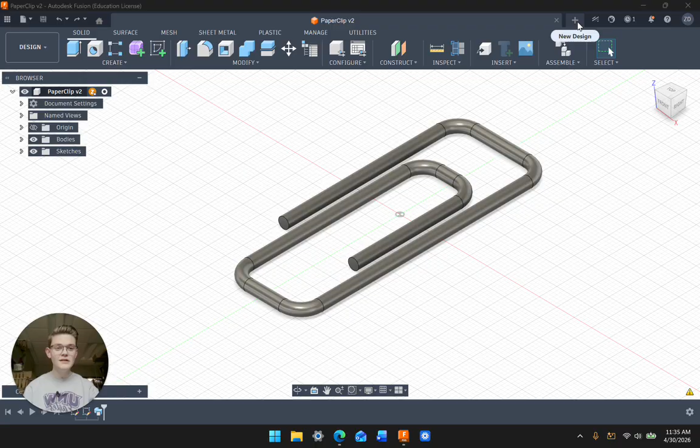The first thing, we're going to create a new design, and we are going to create a sketch on the base plane here on the bottom. Now we're going to make the overhead view of the paperclip, so we're going to create a line going 50 millimeters up.

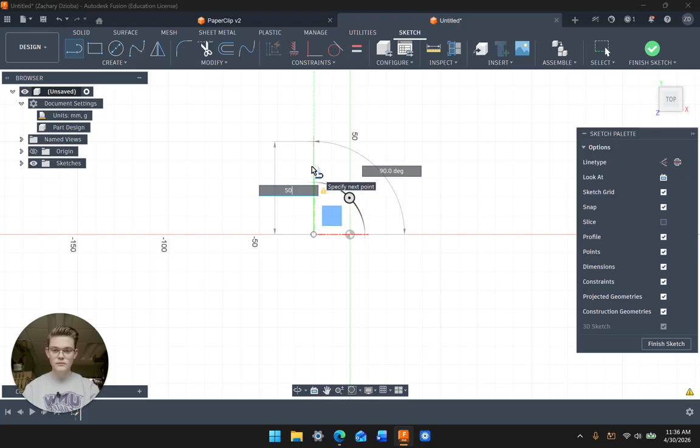Oh, my line just disappeared there. We'll try again. And then we're going to make a line going 25 millimeters over here.

Now we're going to go down 70 millimeters. We're going to go over 20 millimeters. We're going to go up 55 millimeters. We're going to go over 15 millimeters.

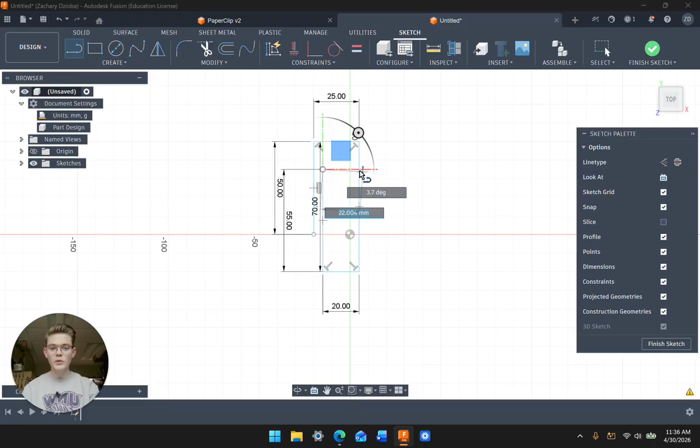Oh, my line deleted itself again. It's always when you have your mouse cursor on that. You can see there's this red line. If you have your mouse cursor on the red line, for whatever reason, it just doesn't like to work.

We can do 15 millimeters here, and then we're going to go down 35 millimeters. And now we have our general outline of our paperclip.

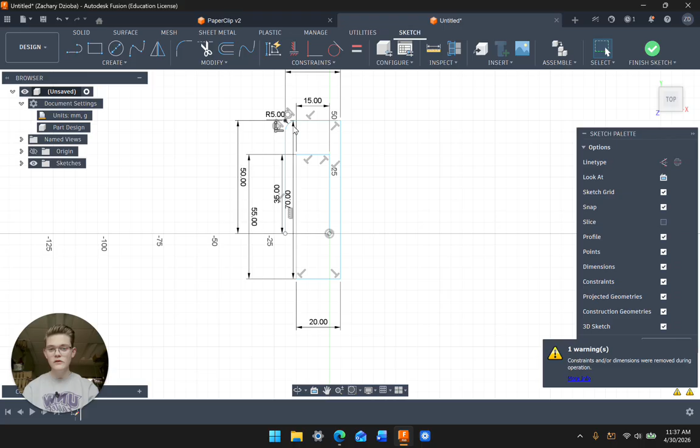It's kind of hard to see right now, but one last touch that I'm going to do is fillet some of these edges. I'm just going to use the standard fillet of 5 millimeters here. Then you can fillet all these edges, and then we can finish sketch, and we have this overhead top view of a paperclip.

Now we're going to create another sketch. Essentially what we're going to do is create a sketch and then sweep it on the profile that we just created, and that's what the sweep tool does.

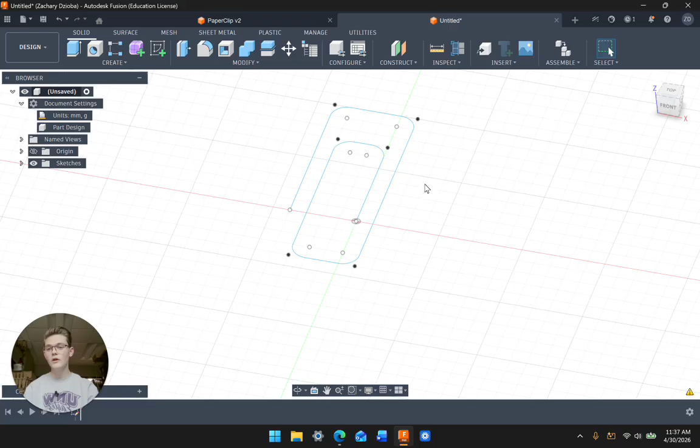So we can create a sketch, and we're going to create it on this plane because we want to create a circle that's contacting this point here on the paperclip. To do this, make sure over here you have 3D sketch turned on. It's usually turned off by default, but we're going to use it here so we can place our circle on this point right here.

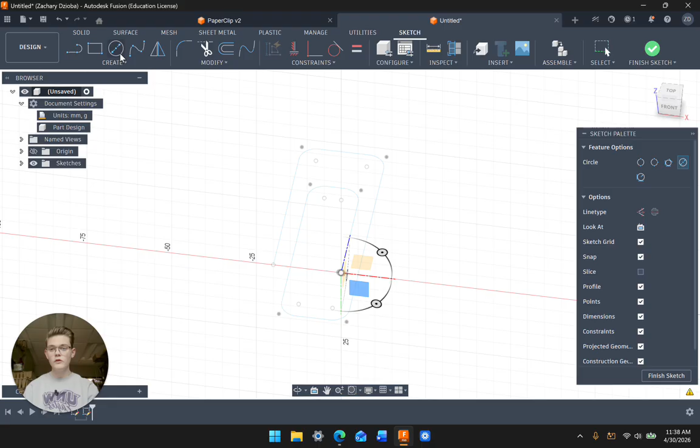With 3D sketch, you can actually, for example, if I create a circle on this point, it moves my plane to that point. So that's just really convenient and nice to use there.

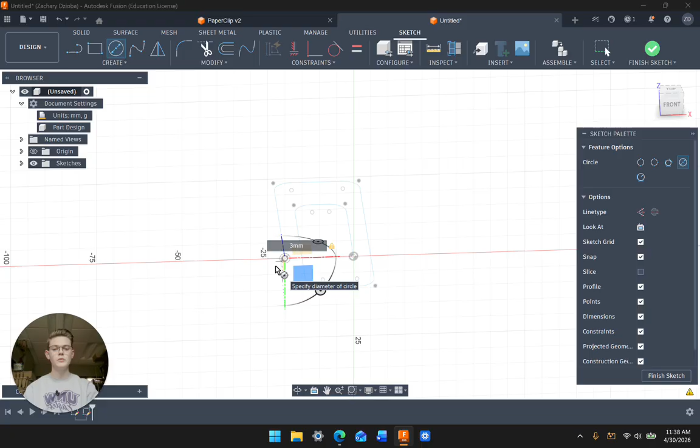So we're going to create our circle right here because this is our profile that we're going to put on our path. And then we're going to just make this 3 millimeters. Pretty tiny, but it'll look pretty good once we get it done. Then we can just click enter.

In future sketches, I would probably advise turning off 3D sketch unless you're actually using it, because sometimes it can screw with things if you aren't actually using it as a 3D sketch.

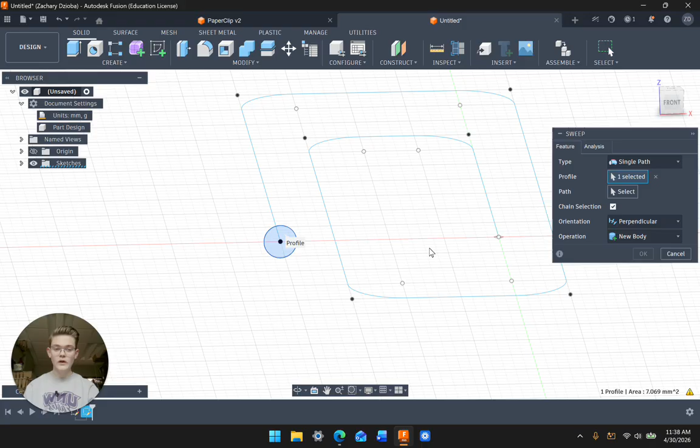So now what we can do is use the sweep tool. Right in here, the sweep tool, and for profile, we're going to select this profile. For path, we're going to select our sketch, and then you can see it makes it 3D, and it makes it into our paperclip.

And that's essentially just how to use the sweep tool. Don't forget to save your project afterwards. You can use it with different profiles, different bodies, and different paths. It makes it really nice to make sometimes more complicated models.